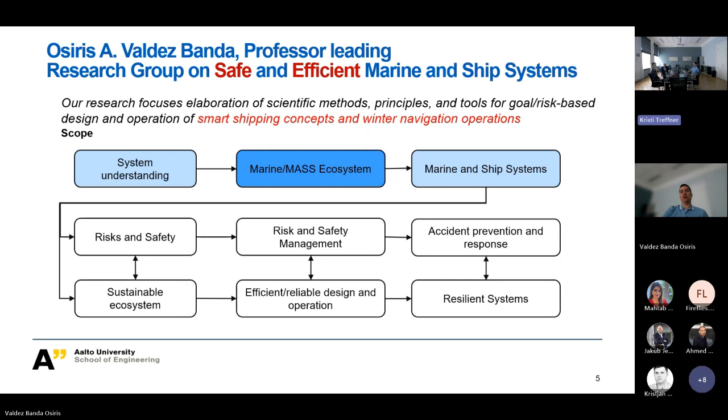And then another aim that we have is how to determine elements to make our systems ready for any kind of event that they may face, and then having at the end what we can call resilient systems on board ships or in the maritime context in general. So this is basically the scope of our research in the thematic that we cover. And in order to make it more concrete, I will show you these two research projects that I will present today. Quickly about my research group, I'm not going to stop on all of them because I'm a little bit concerned about whether we will have enough time to go through the whole presentation, but you can see there.

At this moment, I have two postdoctoral researchers, and then 4 full-time doctoral students working in, for example, data analytics for analyzing risk in maritime traffic, analyzing risks of the new green strategy for the Finnish maritime cluster, and analyzing risks of ships operating in ice conditions. And then, as I mentioned, we have this new topic on resilience of maritime ports and fairways. So that's something that we are doing with 4 doctoral students. Then I have 6 part-time doctoral students, who are people who are working, and part-time they do research also connected with the aims and the thematic dimension.

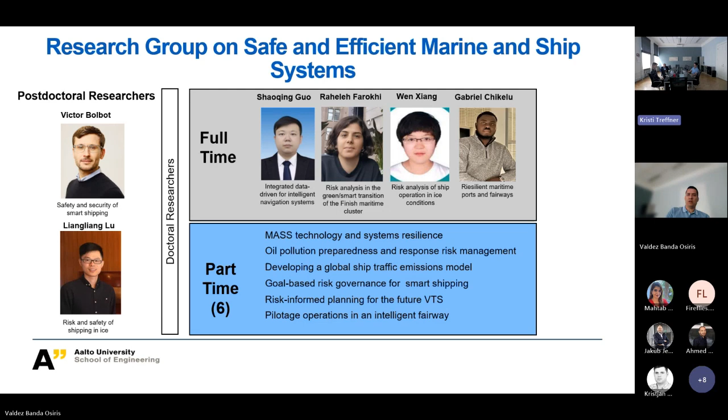I have people working on the development of maritime autonomous surface ships technologies and system resilience. I have another part-time doctoral student in oil pollution preparedness and response risk management. Then another student working on developing traffic emission models. Then goal-based risk governance for smart shipping, and risk-informed planning for the future of VTS. And then pilotage operations in intelligent fairways. So these are some of the topics of my part-time doctoral students.

Then people who already graduated from our group, in the last 4 years at least. Dule graduated with his doctoral thesis on maritime traffic risk analysis in the Northern Baltic Sea utilizing AIS data. Then Sunil graduated on the analysis and management of risk in maritime remote pilotage operations on the basis of the formal safety assessment. And then Miriam graduated on advancing safety in autonomous shipping through modern hazard analysis methods. So those were the titles of their doctoral theses. And today, related to Sunil's and Miriam's theses, we will look into specific developments in the projects that they worked on in this thematic.

So, if we go to the context of smart shipping, many people, when we talk about smart shipping, immediately correlate the concept with a focus on autonomous ships. But we will see that actually it goes beyond that. Still, the autonomous ship is quite important for the concept of smart shipping. It's giving a lot of opportunities for transforming the maritime cluster, and for seeing what alternatives we can develop for good collaboration between new technologies and people with expertise in the maritime world, to allow our future maritime operations to become smarter, safer, and greener, of course. So, if we look into how we can understand an autonomous ship, or how these maritime autonomous surface ships are defined, for example, by IMO.

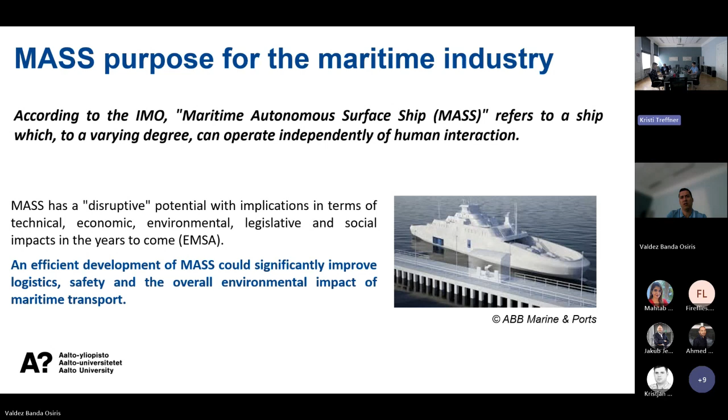So we need to do a lot of work before we can start to see how these concepts or technologies embedded into smart ships are safe by design, which is a quite important element to determine now. So in reality, the big challenge here for smart shipping is that we still need to have this ecosystem perspective, as I briefly defined it before. And this is quite important because it is clear that an efficient operation of any intelligent ship or autonomous ship will require us to establish an intelligent environment. It's not going to work if we are not allowing our operational context to also be intelligent and ready for this type of systems to operate in an efficient manner.

And that gives us a huge challenge, because when we talk about this smart ecosystem concept, we need to understand that we don't cover only those technologies on board the vessels, but also the design of technologies in ports or waterways, so that the whole logistic chain can be transformed into a fully smart concept. So the assembling of this ecosystem and the introduction of these new technologies is generating a transformation of the maritime cluster in general to become more multidisciplinary.

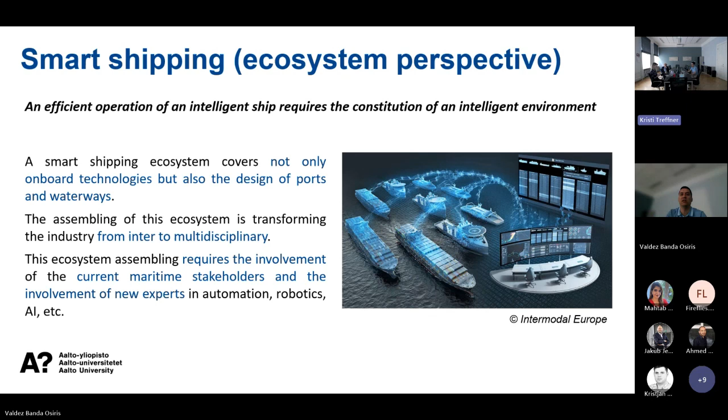So new expertise and new professionals are joining the maritime cluster, particularly in elements related to artificial intelligence and the development of those technologies which will allow these intelligent systems to operate in the future. This is the main introduction of expertise for the cluster. And of course, this ecosystem assembly requires the involvement of the current maritime stakeholders and the involvement of new experts like the ones I mentioned already, automation, robotics, AI, etc. So the challenge is there. It's quite important to understand and to see.

And we will see what has happened in autonomous shipping. I will make this short summary at the beginning, just in relation to projects where I have been involved. I will mention some other projects that are now going on in different areas, in different countries, and what they are doing. But I want to keep it short for the discussions today.

But what I can see from the last 10 years where I have been involved in research related to autonomous shipping is that we started these efforts to think about smart ships, autonomous ships operating in the future maritime cluster, many years ago. If I go back in time, we started this development of ideas, and then finally generated the first projects in 2016 with the Advanced Autonomous Waterborne Applications Initiative.

It was a project to start to test the context and the cluster, not only maritime, but the cluster of technologies in Finland, which can be working together in the future to allow this transformation and to start creating new technologies and new ship concepts and the entire constitution of what we now call this autonomous maritime ecosystem.

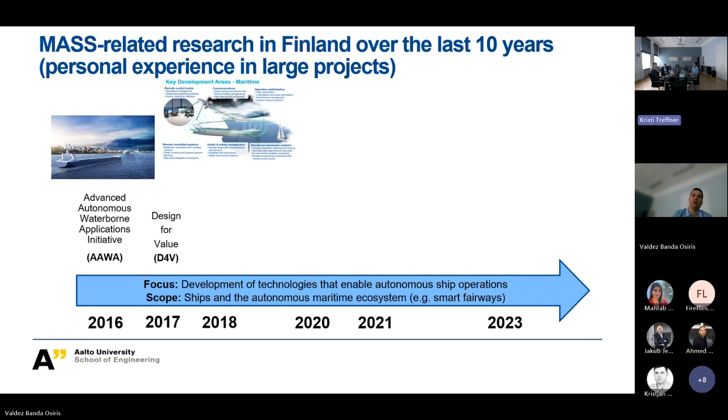And then, of course, we start to talk about how we can ensure safety and what are the elements that we need to basically focus on the assurance on safety on the early design phase, where we need to determine all type of technology that can be implemented to that. So it was a large project that then basically opened to smaller projects, we can call it that way.

We work on projects related to autonomous ferries operating in urban waterways. So we evaluate some specific concepts for application, for example, in the city of Turku in Finland, where the small vessel basically executes autonomous operations in a determined context for moving people safely from one area to another. I think the city of Turku basically has the results of the evaluation, and they are basically moving these ideas forward on developments.

Then after Design for Value, we look into specific applications of smart shipping, and then we create the Sea4Value project, which focus on remote pilotage operations. I'm not going to say much about remote pilotage because it's one of the projects that we will go into details on this presentation. But that's basically something that we start in 2020. We start to elaborate all the bases that we need to allow the provision of a service that gives this pilotage from a remote location.

Then, of course, at the university level, we identified that all these changes coming from this autonomous shipping or this smart shipping will require to basically update the professional profiles of people who carry on tasks in the industrial domain. So we start to look into how to evaluate the changes needed, for example, for the educational programs of maritime professionals that we have in Finland, not only at Aalto University, but I think the entire cluster of universities linked to the maritime domain were basically working together to see what kind of changes are needed for the next 20 years in terms of the education for professionals related to maritime education in general.

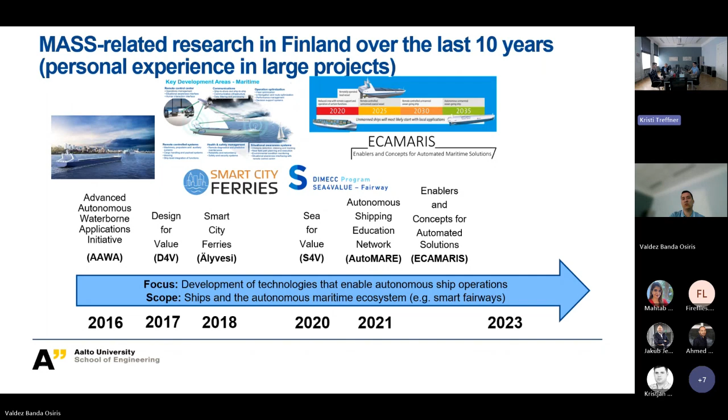Then another project that I'm going to be presenting more in details today is ECAMARIS. We started in 2022, if I remember correctly, we closed it actually last year, which basically we work with an industrial partner for analyzing some specific technologies that will allow to have specific ship intelligent concepts that we will revise in details quite soon.

And then finally, a project where we look more into combination of autonomous shipping, the Green Deal, and challenges that we have, for example, in Finland related to navigation in ice conditions. We start to analyze risks and opportunities from the digital solutions in this strategy or this transition that we go towards having carbon neutral marine logistics and a smarter performance of ships.

Who is funding this Gyroscope? Who is the funder? Academy of Finland. Okay. Yes, this is Academy of Finland. Yeah, Academy of Finland is Gyroscope. ECAMARIS was Business Finland. Aalto was the Ministry of Culture and Education. Sea4Value was Business Finland. Then Smart City Ferries was the European regional funding. Then Design for Value Business Finland, and I think AAWA was also Business Finland, if I remember correctly.

Yeah. This is happening not only in Finland, but you can see other countries are doing efforts related to these autonomous ships and this type of technologies in different projects and cases, at least in these countries that I have below. We can talk more about those later if you want.

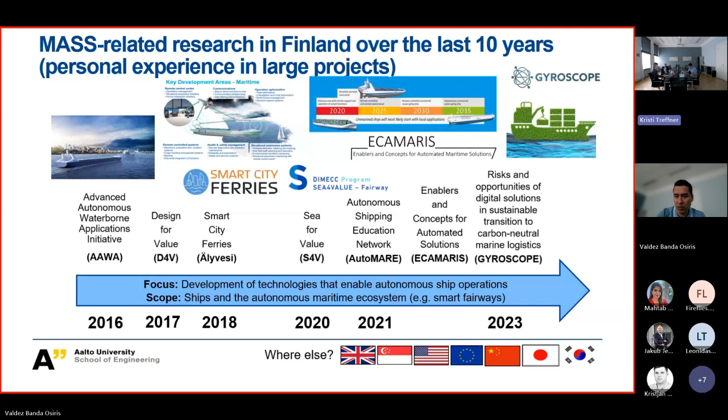So, smart shipping safety assurance. We require to have, like I think I repeated now three times, this systemic perspective, looking to the entire constitution of the maritime ecosystem, if we want to call it the autonomous maritime ecosystem. And basically this is needed because for having this safety assurance, all these smart ships demand understanding of the functioning of the entire ecosystem. And we require the incorporation of multiple viewpoints.

So an interpretation for that. So also we need to see what kind of reception there is for this smart shipping from different clusters in the maritime domain. And sometimes we can see that this reception changes depending on the type of cluster or the group of experts that you are trying to talk to about this new transformation.

And of course, when we think about what is the purpose or what can be the benefit of introducing autonomous ships, or smart ships in general. So we know that smart shipping has to be somehow suitable for increasing the competitiveness of the maritime transport stakeholders. So there has to be a clear benefit for the business side, environmental impact or efficiency of operation. That's something that has to be always represented there.

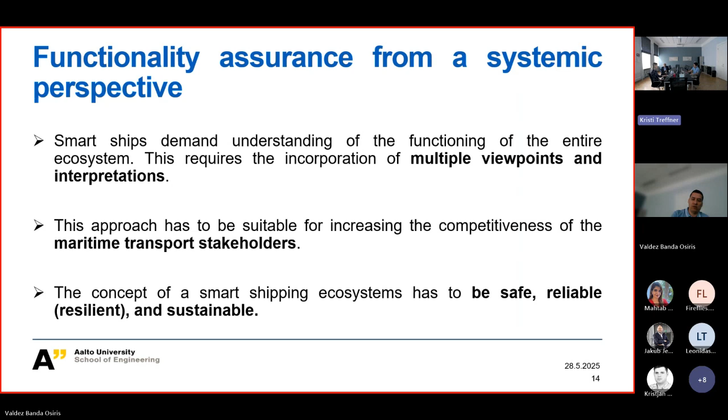And of course, which is more relevant for this talk today, the concept of smart shipping, whatever it is, either a technology on board, an entire new ship concept, or something embedded into the fairways of operation in ports, we know that it has to be safe, reliable, or resilient if we can also make it that way, and sustainable. So that's kind of mandatory for the development.

I was talking with the colleagues this morning about that, especially people with expertise in robotics and AI. They always say that in the maritime cluster we are very difficult people. Everything is difficult in maritime. It's not that we are difficult people, but the entire cluster is quite big. And it's important to understand that the complexity comes from all the stakeholders that you need to get involved in making this kind of transformation.

So that's why sometimes the elaboration or design and implementation of these new concepts is more difficult than in other, for example, industrial transport domains. That's how it is. It's just the nature of the maritime cluster. We need to have this sustainable competitiveness there.

So if we look into the common, I call them here, promises of smart shipping, it will allow us to create concepts which are more competitive due to the increased efficiency. This is basically given by the reduced operating costs and improved environmental performance. So that's the main promise embedded in these smart shipping concepts.

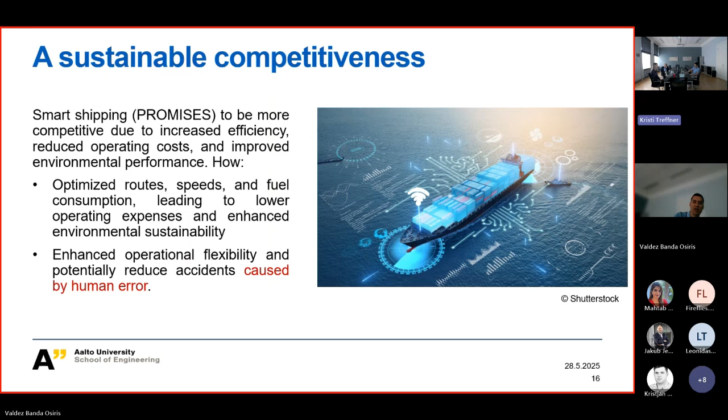So we need to have the humans in the loop all the time, and this is something that we will show in the example of the project that we have. It's not about replacing humans; it's about supporting humans with enhanced technologies, and humans will always be in the loop of autonomous ships or smart shipping concepts.

Then we have different elements pushing forward how we are moving towards the definition of new technologies or new ship concepts. I think many of you may be familiar with the IMO scoping exercise to determine the 4 degrees of autonomy, which goes with autonomy degree 1, ship with automated processes and decision support. Automated and autonomous are somewhat different, and we will review the differences quite soon.

And then, of course, degree 2 basically covers remote controlled ships with seafarers on board. Degree 3 is a remote controlled ship without seafarers on board, and then the final level 4 is a fully autonomous ship. But of course, this is a general way of understanding these autonomous levels. We know that some of these technologies may be drifting in application from autonomous level 1 to 2 and 3, depending on how they do it.

So there are other categorizations of these autonomous levels. Some of the classification societies provided their own descriptions, but I chose this one from a white paper from the One Sea ecosystem, which defined 6 different levels, starting from level 0 with basic operation, then level 1, which is assisted operations. They call it hands-on, eyes-on, mind-on. Then level 2, which is partial automation with hands-off at times, and eyes-on, mind-on.

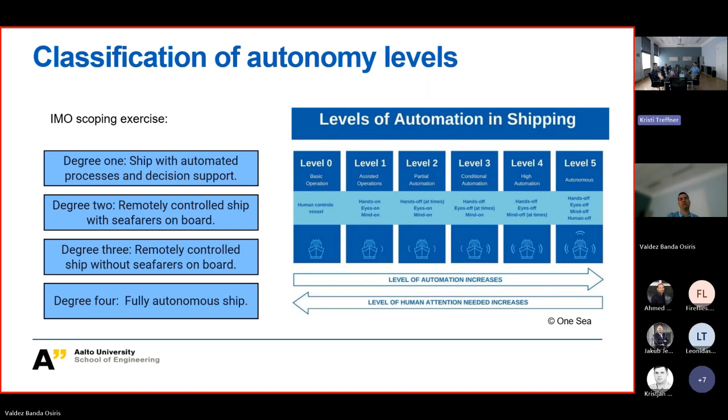And then, of course, another big challenge, where a lot of people are doing huge work, is trying to see the impact on the regulatory framework of introducing this new smart ship concept of autonomous ships. There are many conventions that still don't consider or cannot foresee the incorporation of these autonomous technologies and concepts. You can see some of the examples on the screen.

I'm not going into the details, but there is a group of experts trying to evaluate how specific regulations, for example COLREGs, STCW, and in general everything embedded in SOLAS, can potentially adopt the purpose of these maritime autonomous surface ship technologies.

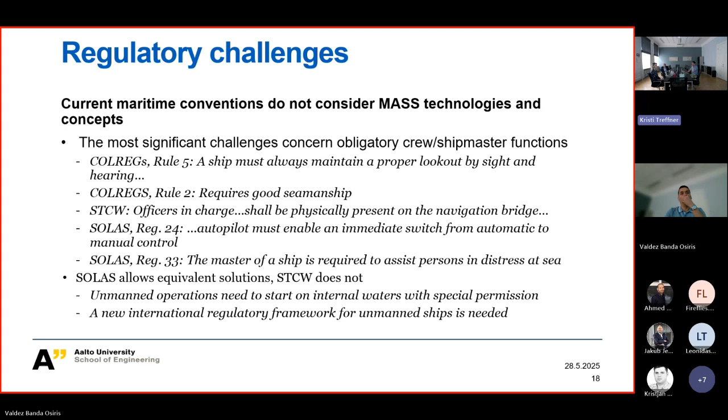Of course, there is the development of the MASS Code, which is ongoing. The first deadline for having it ready was 2026, but I think now the updates are moving the definition of that code to 2028, if I'm correct. So there is a lot of heavy work going on in the development of this MASS Code and its effects on the regulatory framework. So many challenges, as you can see, many things to be incorporated there.

But then we start to look into specific study cases that we have for smart shipping safety assurance. I will start with our ECAMARIS project, enablers and concepts for automated maritime solutions. This was a project that we developed with different partners. ABB, together with VTT, were the leading partners in Finland pushing the project. Aalto University in robotics and AI Live Sim were other partners involved.

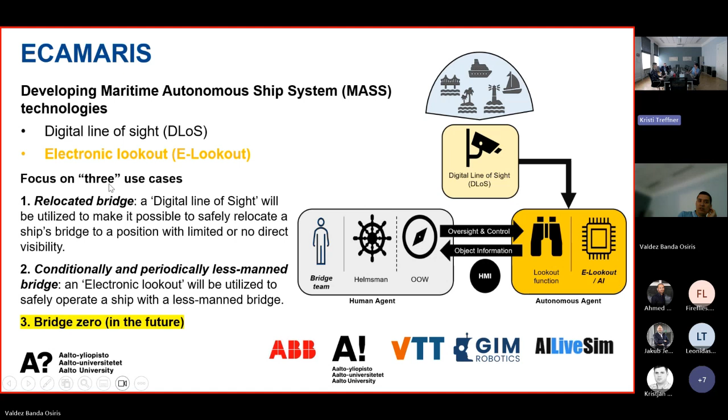So with these 2 cases, we started to look into what kind of tasks we would develop as a basis to start introducing this type of technologies. And then we started to basically create things from scratch just for that technology, just for the application of that technology in a specific context. We knew the type of vessel that we were going to evaluate. We knew the route that the vessel would be operating. And then from there, we started to determine how to basically utilize this technology.

But the first thing that we developed there as a task was basically the development of the concept of operations. So having a CONOPS that determines how the technology will be operating, particularly how this human-machine teaming will be established. As I said, in this market, humans will always be part of the autonomous system, and that's why it's critical to decide which functions will be allocated to humans, which ones to machines, and how you can assemble this human-machine teaming.

So with this human-machine teaming, we can determine the functional requirements, the functional allocation, minimum technical requirements. Of course, we also focus on safety requirements for that. And then to represent the technical capability for executing the operation that we planned in the concept that we introduced.

And then another critical task for us in the project was to describe functional and safety requirements. So describing the functionality of autonomous technologies, representing this functionality and the meaning of automation levels of the technologies with a risk goal-based approach, particularly on the determination of the level of autonomy.

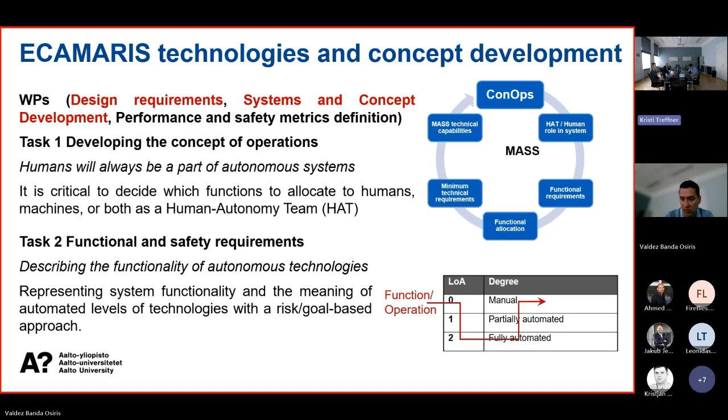We also identified that the technology, those potential concepts and the functionality of that technology will be moving between different autonomy levels depending on the operational context the ship is facing. So it was important to understand that the capabilities of the technology that we had at that time would be optimal only if some requirements for the operational context are fulfilled. But as I say, we really went from scratch in everything we tried to do.

So the first challenge that we noticed is that for developing these concepts, this concept of operation, there were very limited guidelines to establish a process for defining our concepts and these technologies. So we went one step back to define a new process for determining our concepts.

And we produced what we call the ECAMARIS concepts template, which is designed to provide a framework and guidelines to support early and comprehensive identification and collation of key information and assumptions about systems and their operational context. And we determined that this template will support the description of system interaction with main elements and operations. And we can utilize it, for example, for ships, ship systems, for remote control centers.

We also included pilotage and remote pilotage as a concept to be covered with the utilization of this template. And of course, it can be utilized for other maritime infrastructure, for example, defining new technologies for aids to navigation in fairways and ports, support operations, like new embedded elements in VTS, and SAR services and tug assistance. We believe it can also be utilized with this template.

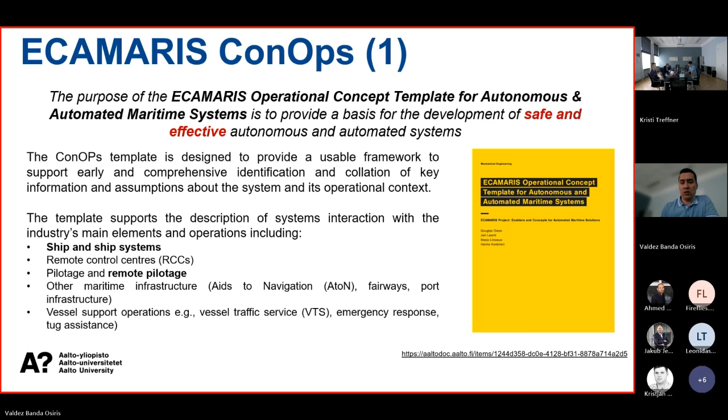But then once we had the template, we started to utilize it for our electronic lookout system purpose. For time restrictions, I will just go into the general elements of what we developed for this electronic lookout.

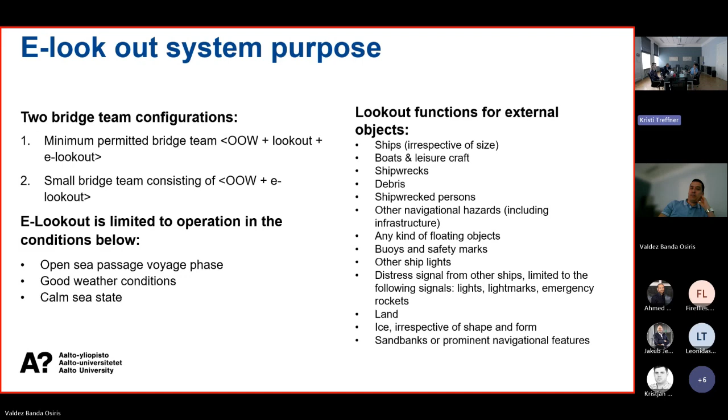So with that, we start to have a detailed description of the functions of the electronic lookout and human automation teaming, as we call it here. We have several functions, and I will try to show this quite quickly. For example, the first function, number 1, says that the e-lookout should continually detect and discriminate between objects of interest, for example, navigation and safety-related objects. And we determine the level of automation by combining a specific stage, where the technology is sensing, perceiving, sense-making, projection, planning, decision-making and acting.

But particularly for the project and for the autonomous levels that I mentioned already, we just focus on defining the functionality of this e-lookout in the sensing and perception stages. And we define that, for example, initial function number 1 is going to be doing the sensing at a fully automated level.

But then function 2 is about recognizing and assigning to a class objects of interest on the surface relevant to navigation and safety, in accordance with the distance defined in COLREGs, with some analysis of specific COLREGs rules. We determined that this function will be doing the sensing and also the perception, but it can go into three types of levels, from manual to fully automated applications, as we can see in the table described there.

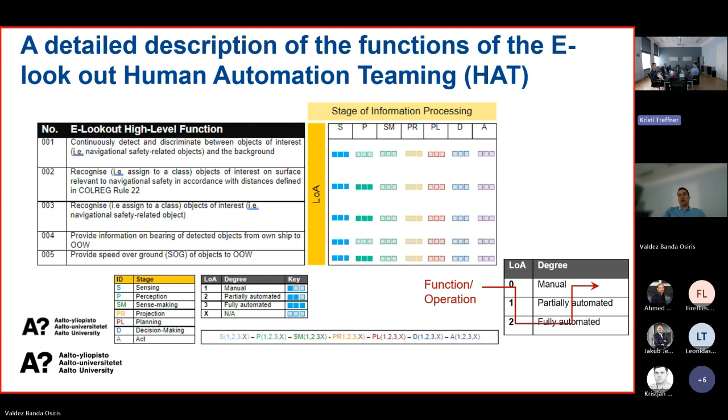But basically, by describing how the lookout should operate, what functionality it will have, and what level of automation each function will have, we start to define the capabilities of this technology, in order to efficiently define how it will collaborate with the people on the bridge, and how it can be implemented specifically in the two concepts that we evaluate: the periodically unattended bridge, and the relocation of the bridge, as I already mentioned.

Then, of course, we look into having these functional and safety requirements. Particularly, we got very good support from experts on knowing how to bring this type of discussion and this type of changes to the IMO level.

So we define a process where we basically put goal-based standard processes for identifying the key enabling technologies and the goals for that on our electronic lookout, and then defining minimal functional requirements related to the operation of the electronic lookout, how this operation can be verified, and evaluate how the conformity of that verification will fulfill the specific regulations that are relevant for the electronic lookout.

And then, of course, how to determine industrial practices and standards for recommending some changes and introduction of this type of technologies. And then for these techniques that we utilize for the whole process, as you can see there, basically there is understanding the high-level functionality of the electronic lookout.

And then having this breakdown of the functionality, making a risk assessment for the whole e-lookout system, determining risk control measures for the issues that we identify in our risk assessment, then cross-check our results from the risk assessment with the relevant rules and regulations, and then the development of novel rules or changes in rules required for the introduction of those technologies is something that we evaluate there.

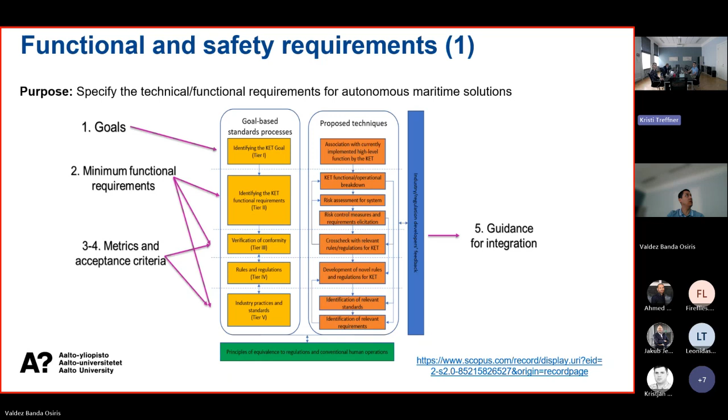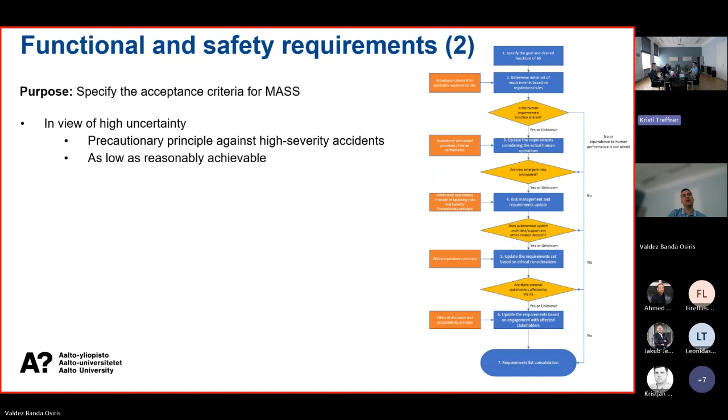But basically, for these requirements, we specified the acceptance criteria for our concept. So in view of high uncertainty, we basically focus on just critical accidents that we need to be preventing and avoiding, in terms of ensuring the technology cannot lead to this type of accidents, like for example collisions. Groundings were some of these accidents mentioned there.

And then, of course, we use this ALARP approach, as low as reasonably possible, or as low as reasonably achievable in this case, for defining how these technologies should control and mitigate the risk that you can have there. As I say, we always do this in alignment with the current regulations and rules. I will show quickly a very ugly table on all the hard work that we did, just for you to know what kind of definition of risk and risk control options we have and how we identify that it's linked strongly to specific regulations.

Of course, we try to go beyond just preventing and responding to accidents, particularly because we see the capability of autonomous ships to go into more advanced practices for safety, like, for example, learning or strengthening the capabilities of the system to always enhance the safety performance. So we try to do some critical solutions for having these elements to allow our system to be resilient, to be prepared for any case that the system may face and not collapse. So it's more challenging. So we try to look into this.

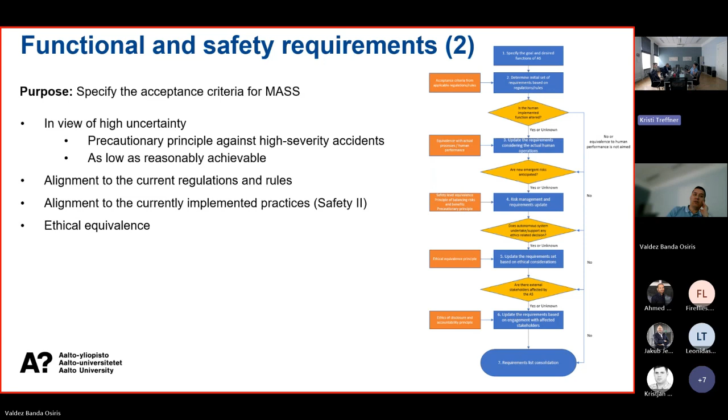Ethical alignment or ethical evaluation or ethical equivalence, as it's called here. So what is the ethical principle that the system needs to be determined there? That's something that was also documented. Interaction with the external stakeholders that can be affected by the utilization of the system. Different risk levels for different stakeholders were determined. Context-dependent requirements: as I said, we were quite specific to know how the functionality is influenced by the determined context where the technology is operating. That's something that we evaluate there.

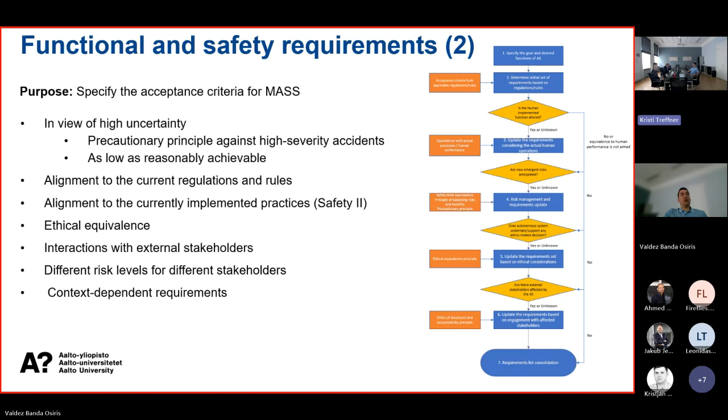And this is what I say about the ugly tables. So this is just to summarize all the hard work that we have on this and all the definitions. We have a total of 7 functional requirements and then 17 RAMs for reliability, safety, maintainability, and availability of our system. And basically, we determine those functions there with a specific label. Then we identify requirements that will need to be fulfilled and what was the main source for these requirements, coming from the specific regulation that we analyzed.

So some examples that you can see there: COLREGs, STCW, and some other design rules were also included there. Then these specific RAMs requirements, we defined them there. So 17, some examples you can see there, like for example, assuring that the functionality of the e-lookout in all environmental conditions in the operating environment should be ensured. Ship movements, temperature, humidity, illumination, vibration, some specifications were basically included there.

My battery is dying, so I will connect my computer quite fast.

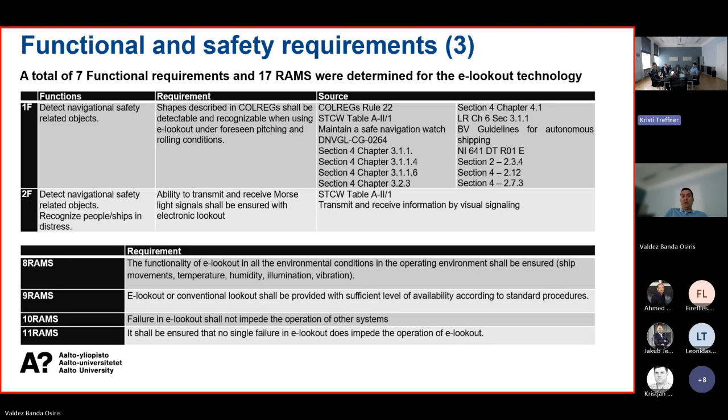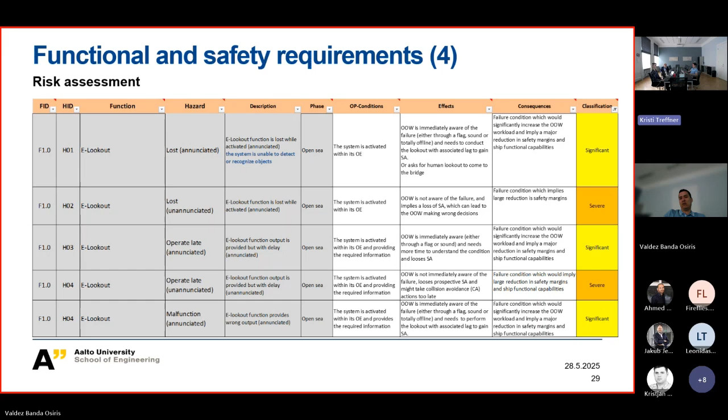Some of these things were immediately linked to a specific risk control option. But of course, there are limitations on utilizing those risk control options. We need to make sure that the control options will be properly adapted to understand how the system should operate when we have all the needed context available, to confirm that we have all the optimal conditions for the most efficient utilization of our electronic lookout. So all details were analyzed there.

So in conclusion, for this electronic lookout, the e-lookout, the development focused on its application for a specific ship conceptual operation. When I say ship conceptual operation, we evaluated a specific carrier, a small container carrier. That was our main case of evaluation. And the route that we were evaluating for this ship was navigating between Helsinki and Travemünde in Germany. That's something that we evaluated as an operational context.

The development of the work focused on the basis for defining a coherent and initial solid CONOPS, something that we can build on. So identifying how, for that context, for that ship, the electronic lookout may be efficient, and then potentially elaborating more elements for future development of the concepts or other case studies where we want to utilize the electronic lookout in the future. For example, this zero bridge concept is something that we are discussing for potential future developments in the upcoming year. Then it says here the functionality of the lookout is now determined in specific team configurations and operational conditions. As I said, it just gives the basis for future development.

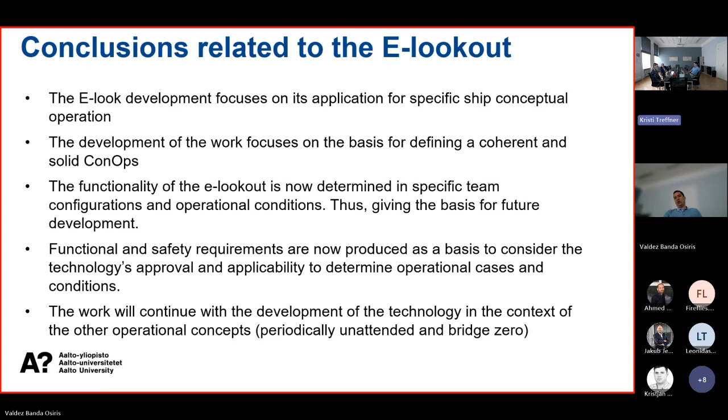Functional and safety requirements are now produced as a basis to consider the technology's approval and applicability to determine operational cases and conditions. So these requirements and this research and evaluation that we did were presented in different groups, some of them at IMO level, some of them at European level. So we were presenting the potential application of the electronic lookout for practical implementation in the future. And the work will continue with the development of technology in the context of other operational contexts, as I said already, like this periodically unattended bridge and also the bridge zero concept. So that was about the electronic lookout.

Then I will jump into Sea4Value and focus on remote pilotage operations. So remote pilotage, or the Sea4Value Fairway program, was a very long project. You can see all the partners involved in that project. The funding instrument was Business Finland, but the main idea here was to establish the basis for generating a new service that allows remote pilotage provision in specific fairways in Finland. So the idea is to work hard towards having this type of service ready in the upcoming 5 years. That's the target that we have. There are new initiatives that we are working on, developing the continuation of the work that you will see here.

So let's make clear what remote pilotage actually means for our concepts. Instead of pilots boarding the ship, in remote pilotage the remote pilot will support the ship crew remotely from a shore control center.

So it's not remote pilotage control, it's just the provision of assistance from a remote location, so that the pilot is in a remote location, and with the instrumentation of an intelligent fairway and the ships which are selected for the provision of this service incorporated into this joint technology, the pilot can basically provide instructions and allow this remote pilot service without the need of the pilot going on board. So it's not remote controlled.

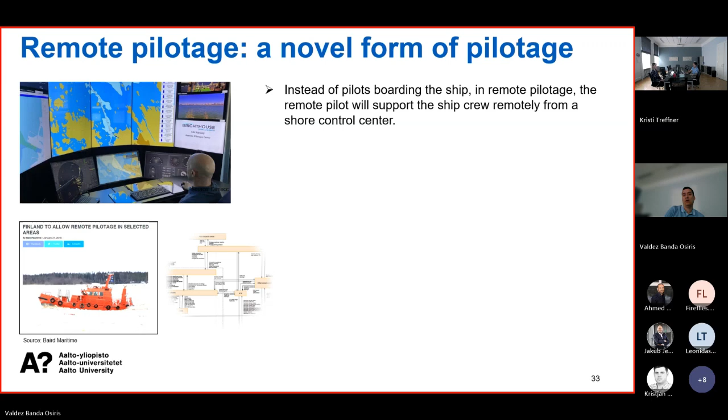That's something I want to make quite clear, because some people tend to believe that when we talk about remote pilotage, people are basically taking control from a remote location, at least not in this case. Of course, we are thinking about potential developments. This is something that is still in discussion, a potential new application in the future, but that's not the main focus that we have in this project at this time.

So in order to start to think about this remote pilot service, we also need to look into what the Pilotage Act in Finland specifies on the provision of pilotage. The Pilotage Act was amended in 2019 and then again in 2023. And for 2023, we needed to do a detailed risk analysis of critical fairways in Finland, and authorities were involved in that work. We evaluated the type of risk on these critical fairways and thought about what are the possible optimal fairways for the provision of this remote pilotage.

Unfortunately, the risk assessment that we did for critical fairways in Finland is not publicly available because it's with the maritime authorities. But this is something that we did in trying to clearly understand the risks that we have on critical fairways, and then to think about what is going to be the main challenge when we focus on the provision of remote pilotage in the future.

There are some additional challenges in this remote pilotage concept. We have more embedded software and new advanced technologies, which are prone to software and design errors. This is quite important, and something we will see through the full presentation: one of the main challenges for the maritime domain is that when we create these new systems, we need to make sure they are safe by design. So the entire cluster will need to invest more effort and resources to make these systems safe at the early design phase.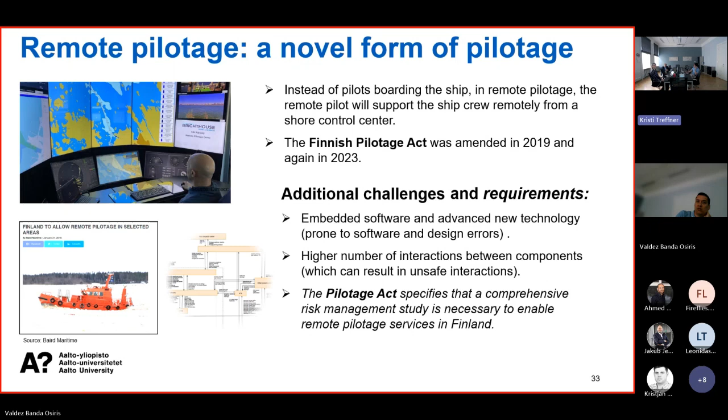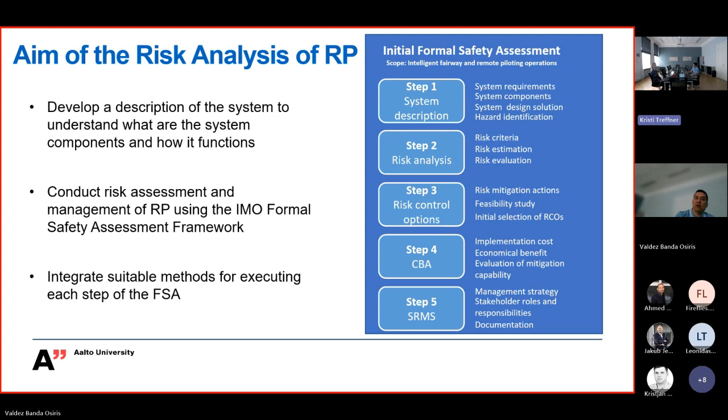So then for this risk analysis we basically integrate different types of methods, kind of like novel methods, for executing each step of the formal safety assessment. And then finally we try to determine a solid basis for a management strategy, defining roles and responsibilities, documented for remote pilotage. So that's basically what we followed in the process for our risk analysis.

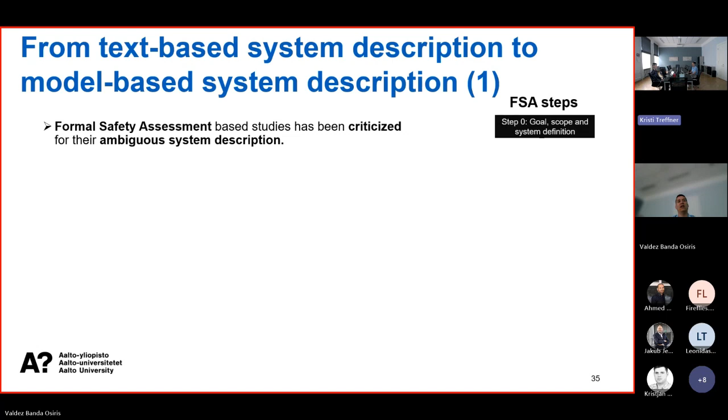But of course, one of the biggest challenges in this FSA was the system description: defining the goal, scope, and system definition. As the formal safety assessment has limited guidelines on how to define the system, we needed to look for more advanced alternatives, which allow us to define systems and use models to define our system, supporting the elaboration of the technology and the analysis we need to include in evaluating its design, like analyzing risk and determining safety aspects. So with this limitation, we started to look into new alternatives.

Particularly, we looked into model-based systems engineering. This is an approach that helps to reduce the ambiguity or lack of support from specifications in the formal safety assessment, with the use of models, minimizing text description to go more into alignment and connection of all components, models, functionality and calculations that we can do for the functionality of such systems. This is not easy to adopt because we realized that in model-based systems engineering there were different methods available.

So we first needed to define, together with end users, the people who are designing or will operate these technologies embedded into the remote pilotage concept. We started to test different alternatives with them. I think we tested around 3 options for model-based engineering. And then we tested common approaches utilized for risk analysis, for example fault trees and hazard exercises, and then we tried to see how the functionality of all the alternatives allowed us to select the most suitable alternative for the case of remote pilotage.

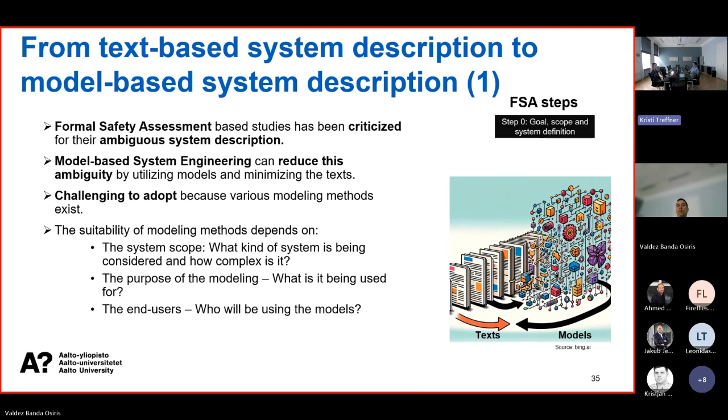So we tested, and then we determined a process for how to make this selection. It's important to understand what kind of system is being considered and how complex it is, and the purpose of our modeling: whether the model is going to be used for supporting the design phases of the technology, or just for analyzing safety and risk aspects, or both. That's something we include there. And then, of course, heavy consideration of the end users: who will be using these models and for what purpose, supporting the development of the entire concept.

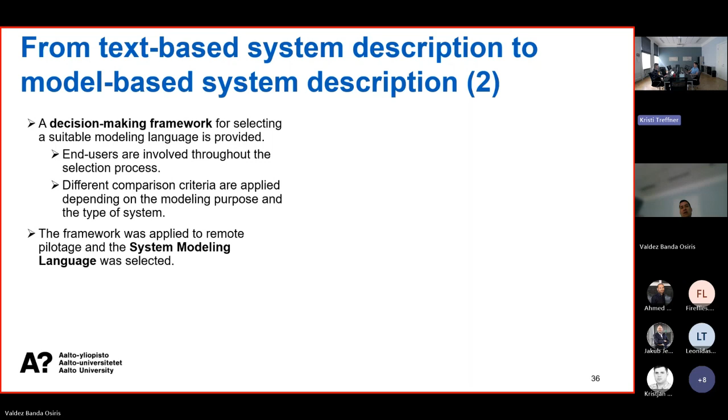So what we did is kind of a framework. We utilized it to make these comparisons together with end users on these modeling techniques, and basically defined a specific modeling technique.

The tool that we utilize for this is SysML, which allows us to have diagrams describing the entire components of remote pilotage and the entire processes defining how remote pilotage is supposed to work and the involvement of specific stakeholders in different parts of the process, and then start to identify how this composition of components in the process will interact and what kind of behavior we will have in the operation of the systems, to understand how the entire remote pilotage operation can be provided and how it's supposed to work in a defined process.

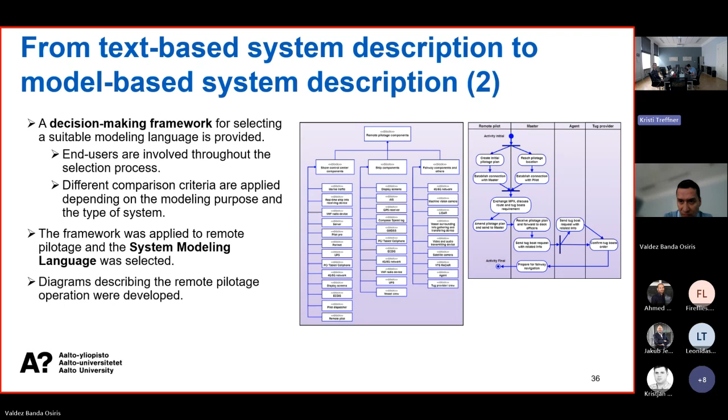So we have different types of diagrams. I'm just showing these two short diagrams, where we have the description of components and then the remote pilotage process in the general view. Of course, when you go into the elements on these models, you will have more details related to requirements, specifications, and the execution of each step of the process for remote pilotage. But I will also show you where you can find that information in more detail in the specific publications.

Then we did our hazard analysis utilizing advanced methods focused on a systems engineering approach, which is STPA, System Theoretic Process Analysis, which is basically a new, well, it's not new anymore.

We have more than 10 years of hazard analysis technique for complex socio-technical systems, which consider safety as a dynamic control problem rather than just focus on preventing failure. So how to basically put actions among different kinds of components on the system, or even roles of particular stakeholders, to enforce a specific safety performance,

and then defining what is going to be the feedback that you will get to know that the actions that you implement on each part of the system are effectively working. So some kind of confirmation to know that the actions for controlling safety are being efficient and can be corroborated by a specific stakeholder or by a specific component in the system.

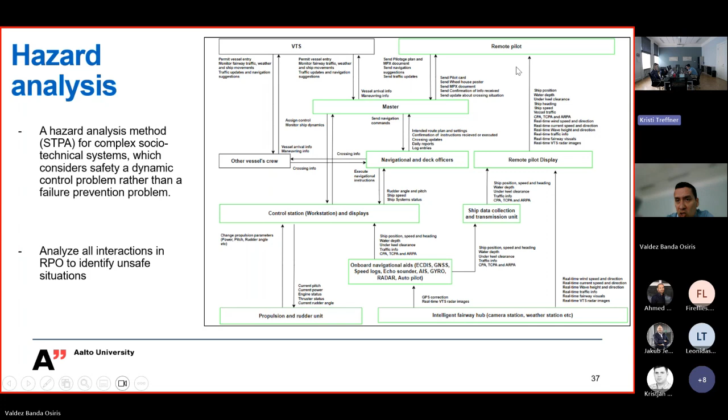We analyze all interactions in remote pilotage operations to also identify potential issues or potential unsafe actions, unsafe control actions, as we call them sometimes, to know what are the issues that we may face, and then to later elaborate what we can do about that.

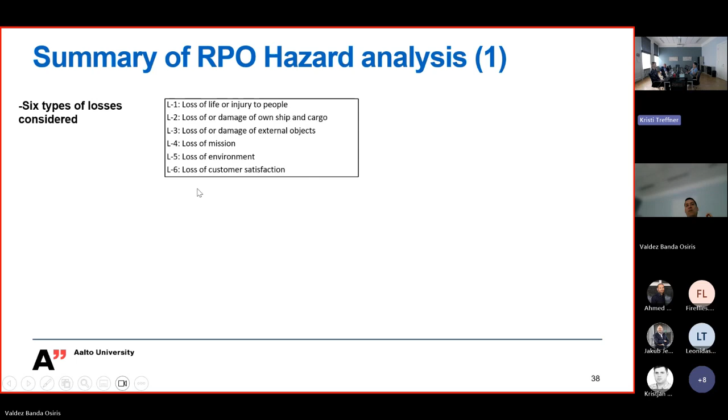So in the hazard analysis, we basically focus on 6 specific losses, going from loss of life or injury to people, loss of or damage to ship and cargo, loss of or damage to external objects, loss of the mission, loss of the environment, affectations to the environment, and then loss of customer satisfaction were the main general losses that we evaluate there.

We have 5 system-level hazards considered there. So ship violates minimum separation standards en route, ship does not maintain a safe under-keel clearance, ship leaves designated route, lack of communication between remote pilotage stakeholders, and then lack of information sharing between remote pilotage stakeholders during the execution of the operation.

And then once we identified these system-level hazards, we went into the task together with end users of the remote pilotage to identify more than 150 unsafe control actions that need to be tackled, and we need to know how this will be controlled. So I just made a short list of some of them that we identified and how they are linked to a specific hazard.

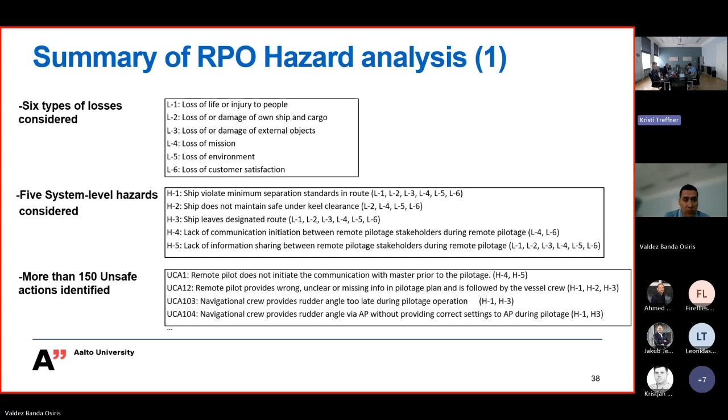So we then combine these unsafe control actions to identify more than 800 unsafe scenarios. So they are causing these unsafe actions that we see. And then we start to analyze them in different categories. So we have more than 50 categories to include these unsafe control actions that we detect. Issues related to hardware, issues related to human factors, issues related to incomplete, incorrect, unclear, or lack of data.

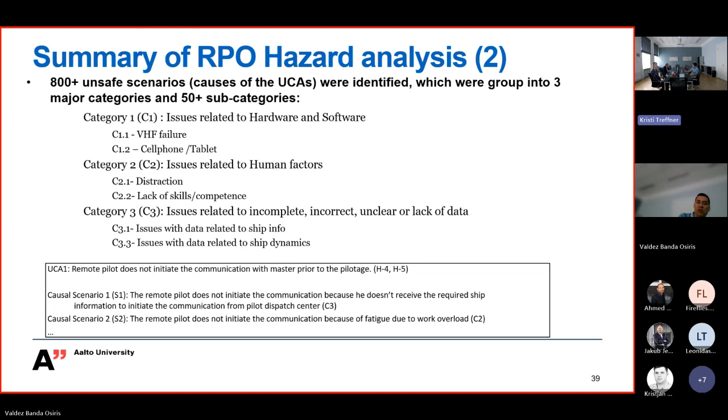And then once we know the categorization and the identification of these unsafe control actions, we start to redefine controls to ensure that these unsafe control actions can be mitigated, and what kind of mitigation strategy will be used for controlling this type of scenarios that we identified there.

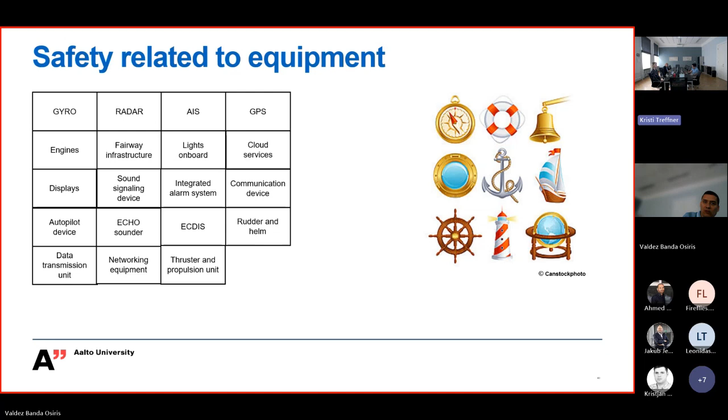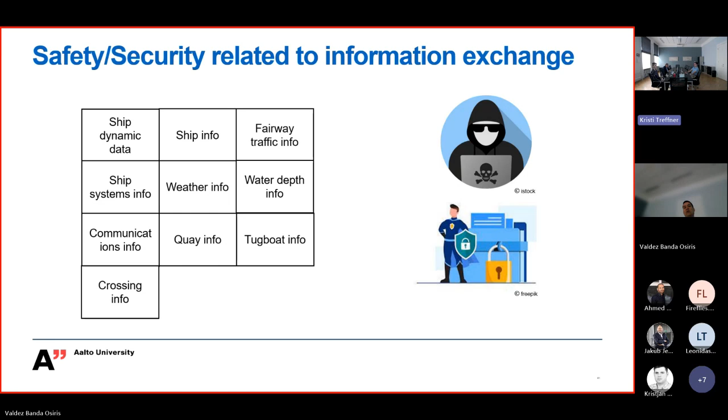So, as I say, we evaluate different types of clusters: safety related to the equipment. I'm not going into details here. You can see all the equipment that was included in the evaluation. Safety and security related to information exchange. This was very important, especially because the information is transferred from a remote location. So everything related to ship dynamic data, fairway traffic info, systems on board, weather info, water depth, and other types of communication that need to be transferred in the provision of remote pilotage was also evaluated there.

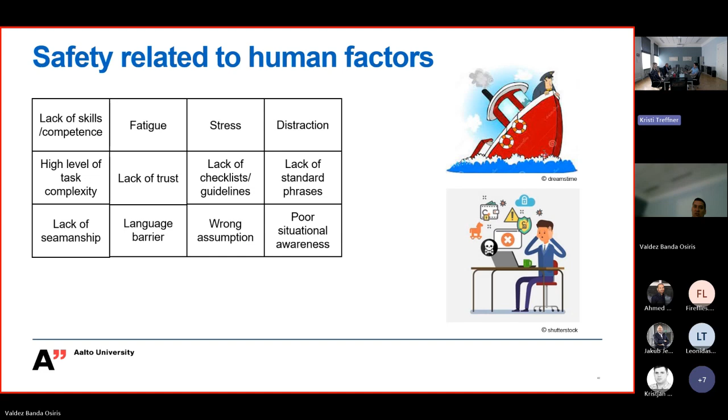Just to show an example of how the evaluation goes in these human factors, if we focus on the lack of skill or competence, we focus on evaluating skills related to the remote pilot: navigational suggestions, pilotage planning, establishing connections and sending information, suggesting emergency procedures, communication skills, situational awareness and handling of new equipment, among others, were the things that were discussed on this lack of skill and competence.

The skills related to the master and the navigation crew of the ship that is eligible for this remote pilotage. So vessel navigation, communication skills, executing emergency procedures, and understanding the kind of instruction given by remote pilotage. That's something that we basically evaluate there.

Some risk control measures for that. So selection of the ship and fairway for knowing where, how, or when this remote pilotage can be provided. Simulation practice of remote pilotage, something where people can be tested, getting to know how the service is provided. Experienced and skilled pilots on some kind of training or preparation needed for that. We're also evaluating that as a risk control option.

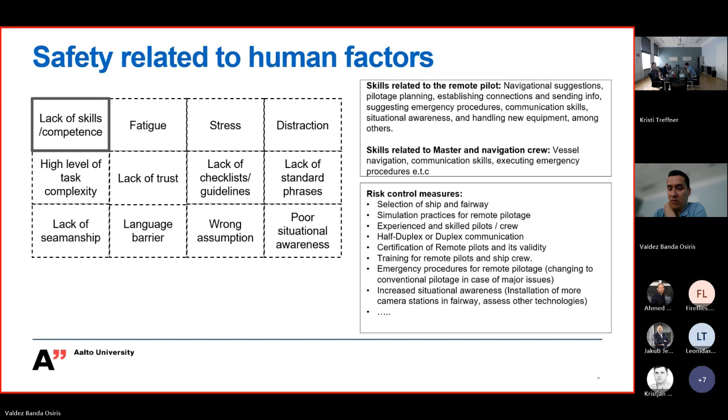Duplex communication or half-duplex communication was also mentioned there, as having this kind of robust instrumentation for ensuring that the communication is working all the time. And then certification of remote pilots and its validity, training for remote pilotage, as I say, including emergency procedures and other elements related to how to better understand specific situations and how to react to those. So different types of risk control measures were analyzed there.

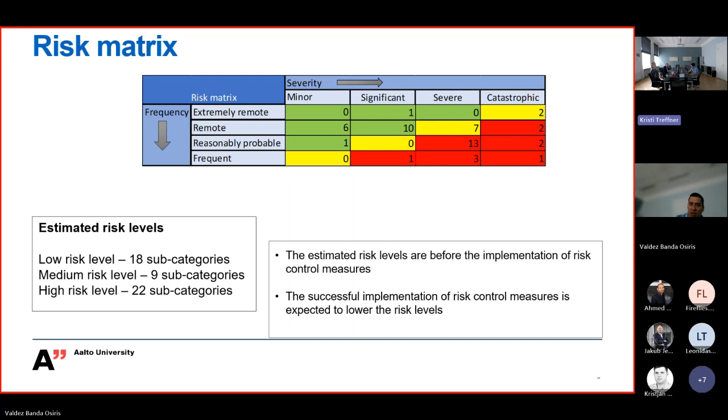We basically categorize these risk control measures in the estimation of risk. So we have some 18 subcategories as low risk, 9 subcategories included as medium risk, and then 22 subcategories as high risk levels. This categorization was actually done before we see the effect of the implementation of risk control measures. So the idea here is that the risk control measures are supposed to reduce the risk. We have some kind of initial evaluation about that.

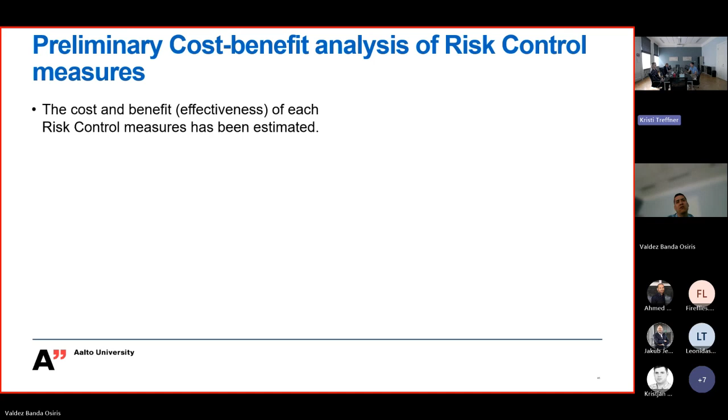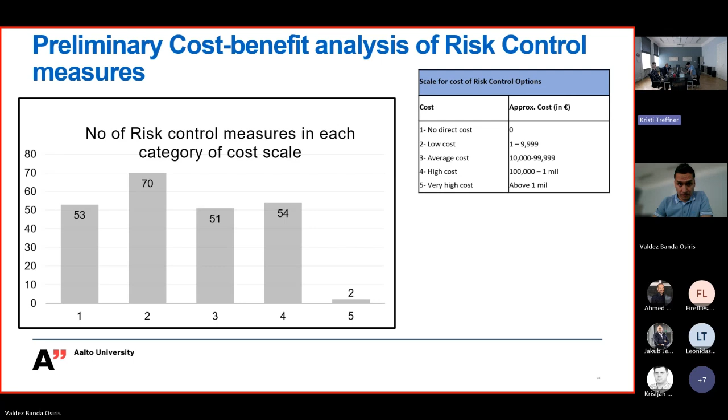Then we start to evaluate the cost of implementing those risk control options. As you can see there, 53 risk control measures are considered to have no direct cost, and only 2 risk control measures with a cost above 1 million euros were considered. So the main number of risk control measures were estimated as no direct cost or low cost, and the other half was split between average cost and high cost, going to a maximum level of 1 million euros. That's how you can see it there.

Then, of course, these risk control options can be evaluated on the cost of implementation in an individual way. But people are also interested in how effective it will be if we combine different risk control options for the different alternatives that we propose, and to see what is the most effective with the least cost, to try to find configurations which are more suitable.

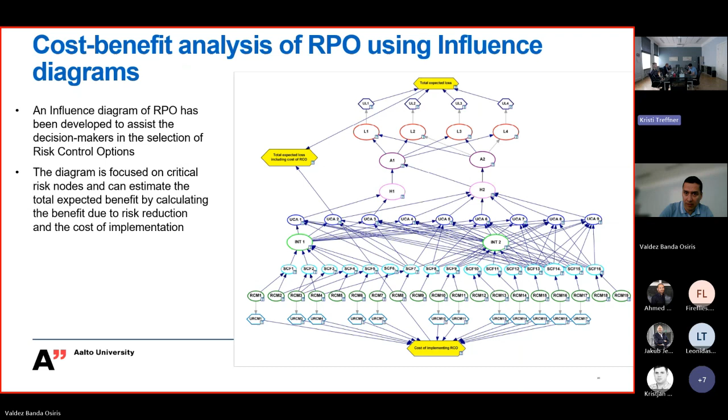So I'm showing this model that we created for evaluating the connection among risk control options, but don't pay attention to the model. I know it looks ugly and difficult to read. And we know also from the stakeholders that, okay, the model works, but it's quite difficult to utilize as such. So what we did is utilize this model, these diagrams and the entire model for the calculation of the most efficient combination, to create a specific interface. Basically nobody likes to see this type of model. That's the purpose of that picture there.

Then we created an interface so you don't need to see the model as such, but you have software interacting with the functionality of the model to calculate the combination of risk control options and see the effect on reducing the risk, the issue you are tackling with the risk control option and its effectiveness on reducing the risk, and then also the cost of implementing those combinations.

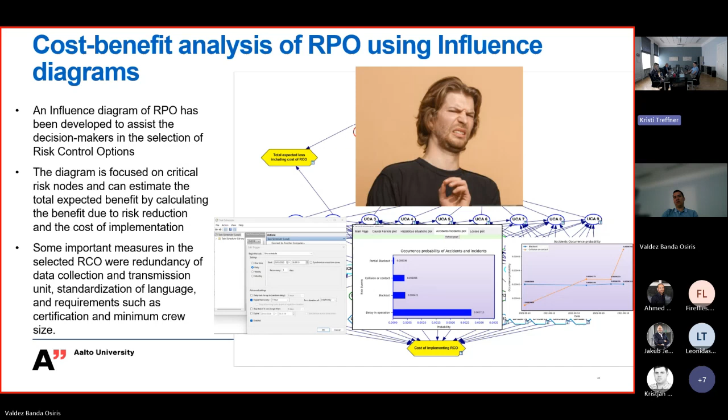So more details about this analysis I will share with you, but this is kind of like a nice tool that we created. We are trying now to utilize the basis of this tool even in other projects where this kind of cost-benefit analysis always needs to be calculated. But that's basically what we do.

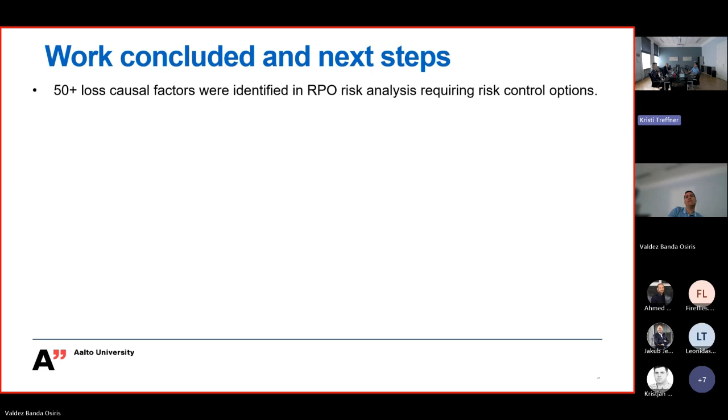So, conclusions from remote pilotage operation, and in particular from this work that we did for the risk analysis of remote pilotage. More than 50 causal factors were identified for remote pilotage, and specific risk control actions were determined for them.

The risk management strategy defined with the risk control options should be used as a foundation for defining a structured management system to continue the design, because it's not yet ready, and the future operations of remote pilotage. That's something we are working on in new project ideas and applications that we are now developing in Finland.

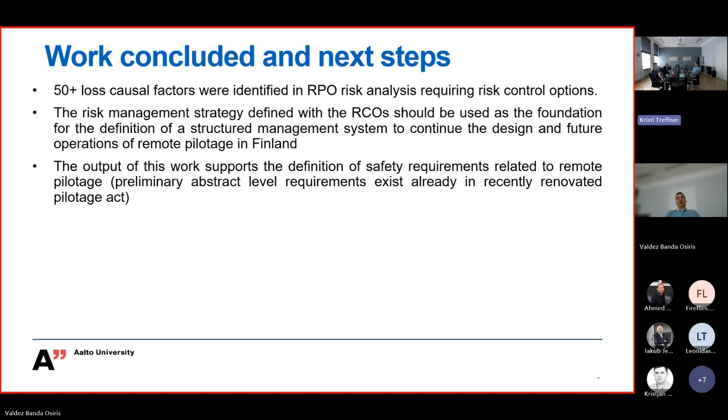And the output of this work supports the definition of safety requirements. We mentioned it also in the previous presentation of the project, but this is particularly in relation to remote pilotage. Preliminary abstract-level requirements exist in the recently renovated Pilotage Act, but this kind of information can give more detailed instructions or requirements to specify how remote pilotage can be done in a safe manner.

In the project, we carried out a demo for remote pilotage in Finland in 2022. And the results of this study were also utilized in demonstrating, or basically making the setting for, remote pilotage, and then to corroborate what kind of issues are still faced in the actual execution of remote pilotage as such.

For next iterations, the scope of the analysis should be expanded to a higher level. So we want to include more views from management and other authorities, maritime authorities, for this entire remote pilotage. So our idea in the plans that we have to continue this remote pilotage work is to extend this risk analysis to the entire umbrella that can be covered, and how safety can be controlled if we think about providing the service in the future.

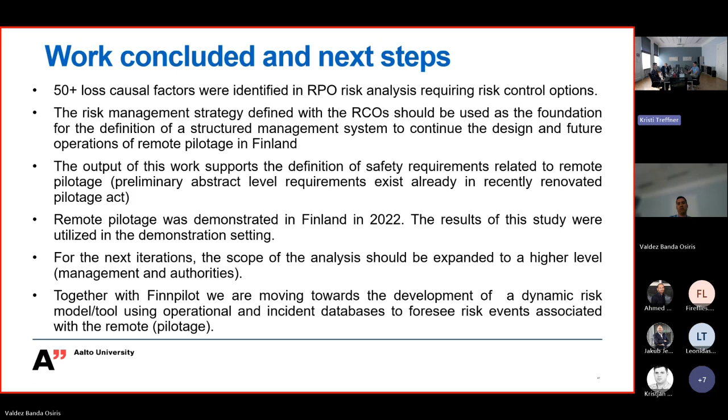So together with Finnpilot, we are moving toward the development of a dynamic risk model tool that can be utilized at any moment for operations and analysis of the operational incident database, to also try to foresee some risk events associated with remote pilotage and take action before we face any issue. So more of a proactive approach to control risk, and more dynamic. That's the idea that we have.

So I'm just closing quickly. As I said about GYROSCOPE, we are working on risks of smart shipping and green strategies. In GYROSCOPE, we are trying to look into autonomous maritime technologies or solutions that can be incorporated into aspects related to winter navigation. So we have discussed what kind of technologies can be utilized, for example, to provide assistance to ships operating in ice, or to be aligned to the role of the icebreakers, and a better way that they can control what vessels are doing when navigating in ice conditions.

Several cases can be discussed with them, and some potential actions to move forward. This collaboration is discussed with some specific stakeholders there. Of course, when we talk about autonomous shipping in ice conditions, it's a totally different approach. It's more about how those technologies can be a good element to enhance the very good and advanced work on controlling safety that icebreakers and all the maritime cluster linked to winter navigation are already doing in Finland. So that's our main purpose.

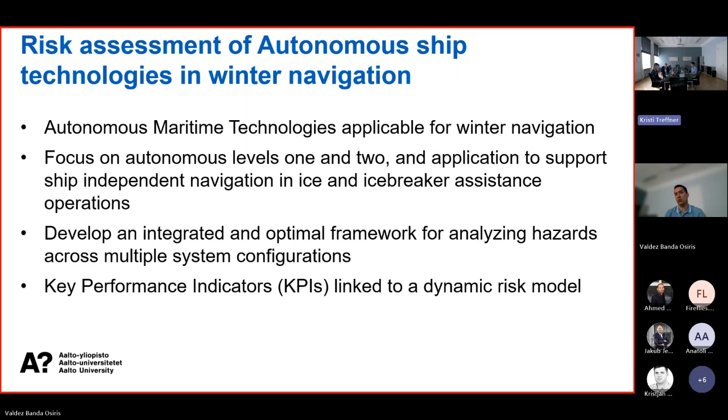So develop an integrated and optimal framework for analyzing hazards across multiple system configurations. That's something that we are trying to do. For example, if we utilize specific technologies like this electronic lookout, or technologies related to sensors and cameras, how they can be utilized in the provision of specific assistance operations, and then how we can elaborate specific indicators in a model that controls, ensures, or analyzes risk in a dynamic manner for the potential applications that we may have in the future for this project.

In Aalto, we have this autonomous shipping model for operations in ice. So we're trying also to test how technologies like LIDAR, sensors, and other applications can be good for recognizing ice fields, and to determine, for example, the best alternative paths to navigate in ice conditions. That's something that we are doing, or how to calibrate and support a navigational system that allows an optimal operation, for example, if a ship is navigating in an ice channel.

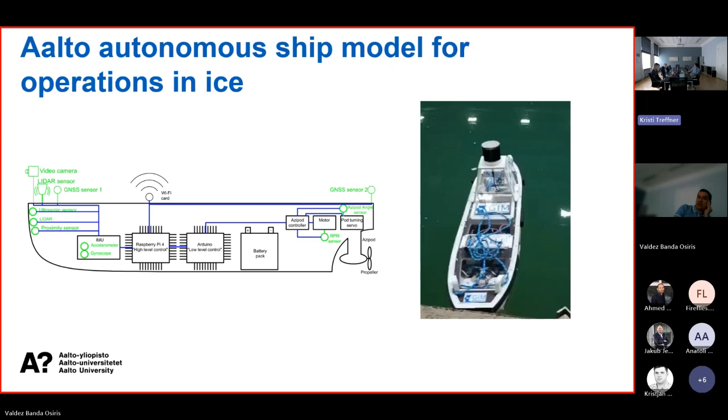So this kind of testing and evaluation is something that we are doing with our models there. So a potential new project is coming if everything goes well on that. So that's something that we are also heavily collaborating on.

And just to close this entire presentation, I'm happy and hope that you are still awake and you find it interesting.

But in general, we see that safety assurance of smart shipping needs to be early in the design phase. So creating technologies and systems that are safe by design is quite important. And this requires a huge transformation in the approach that we utilize in the maritime domain. Then systems complexity and software-controlled operation will be increasing. That's something that is embedded in the nature of developing this smart ship concept.

So it's important for us, and particularly for people related to research and with scientific foundations, how we can adapt or create new methodologies to assess risk and determine safety management strategies in a dynamic way. That's very important.

Human-automation shared control requires efficient teaming. So as I say, humans will always be in the loop of safety when it comes to smart shipping. It's either the heavy involvement and heavy responsibility they will have in the design phase, and then the needed interaction that we will have among these smart systems, and they will be operating together with humans. So that's how it is.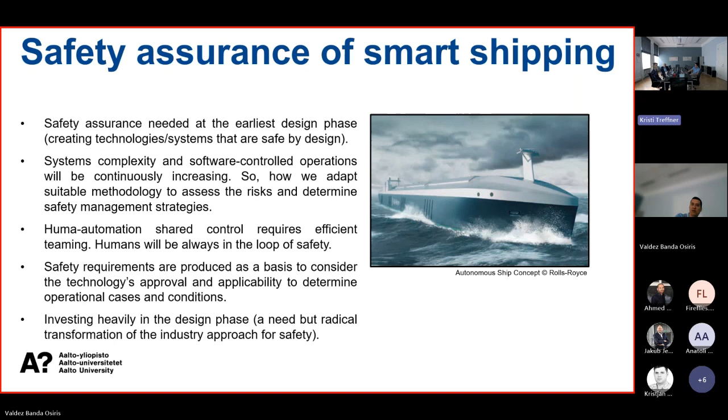Then, of course, there's the issue of security assurance. Not really my topic, but I'm very happy to collaborate with any expert related to security assurance and cybersecurity. That was actually one of the main purposes for me to be here in Tallinn and collaborate here with TalTech. So security assurance is quite important.

So we need to define the data transmission requirements of ships, how we ensure the functionality and the data transmission of sensors, control cameras, and remote maintenance, etc., how this can be executed in an efficient manner and guarantee that our systems are secure at all times. Planning and installation of critical infrastructure such as buoys and antennas and other IT systems, and how to protect those, is also quite important.

Reliable data links between autonomous maritime technologies or smart shipping concepts and the remote monitoring and control center. That's something that's quite important.

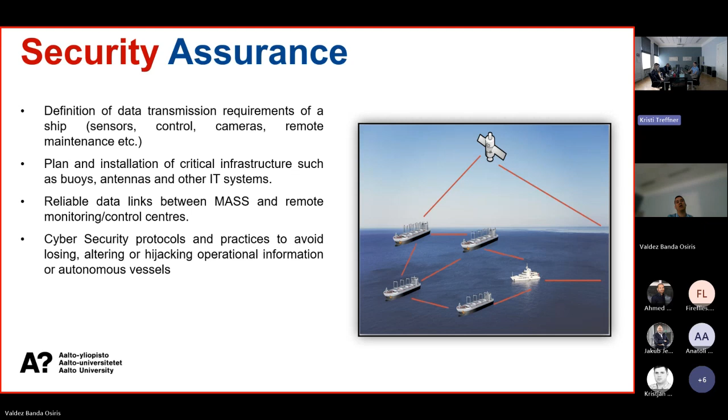Cybersecurity protocols and practice to avoid losing, altering, and hijacking operational information, or potentially even hijacking the entire autonomous vessels. In autonomous systems, we are already collaborating on these cybersecurity protocols with, for example, colleagues in Korea and Singapore. And as I say, that's something we are also trying to push for in the collaboration here in Taltech.

And this is very important, and to know the magnitude of the importance of this type of issue, let's go back in time to remember what happened in 2017, when we had this cyber attack with the NotPetya malware. This is kind of like a cyber weapon that severely affected Maersk operations, even though it was not targeted at Maersk, but it ended up having a huge effect on Maersk.

These effects on the systems basically led to huge congestion of ports and the delay of cargo. Maersk was forced to rebuild its IT infrastructure in 10 days. And of course, this attack created losses of more than 300 million, as well as reputational damage.

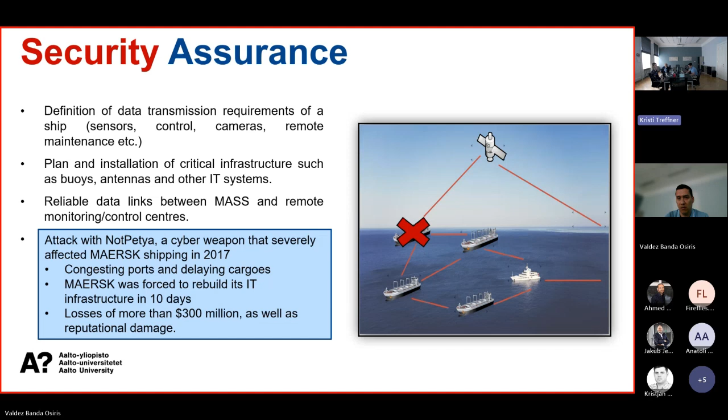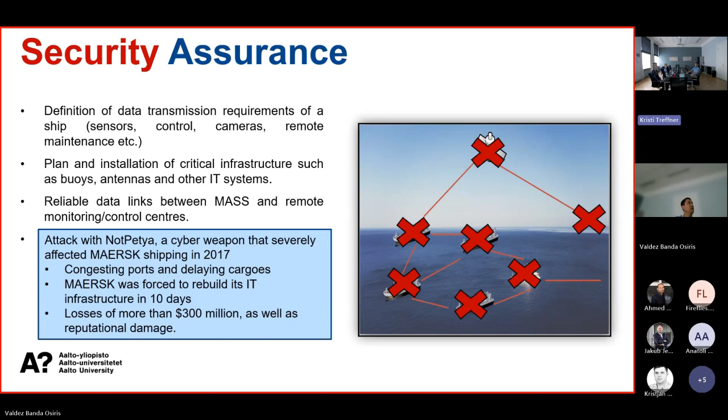So if we think about the future, we are talking about smart ships, which are interconnected. An ugly scenario may be losing control entirely of this smart shipping concept. But a very catastrophic scenario may be affecting everything that is connected within this type of concept, including other ships or other critical infrastructure. So it is quite important to understand that this is an issue we need to work on to not allow it to happen. So I finish here.